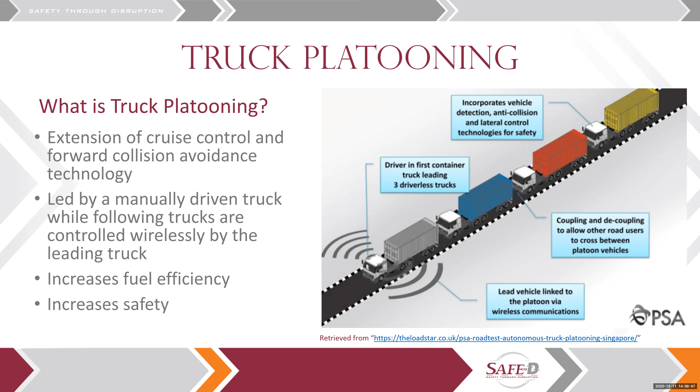Why would we want to have truck platooning? It's because it's considered as potentially increasing fuel efficiency and also potentially increasing safety on our roadways. So the big question is, why do we need this research study, and what are the implications of this research study?

Well, we're talking about truck platooning, and a certain number of heavy trucks, tractor trailers or tank trailers, that are following each other on the roadway. We also know that on these roadways we implement barriers, which could be median application barriers or roadside application barriers. Roadside barriers and median barriers are designed for a single impact. First of all, they are designed so that they should contain and redirect an errant vehicle, not only for the safety of the occupants of the errant vehicle itself, but also for the safety of all other road users that are on the roadway at the moment of impact.

These barriers are usually designed for a single impact, but at the same time, we do know that they are designed with a reserve capacity as a safety factor. So the big question is, due to the consideration that they have a reserve capacity, can we prove whether existing roadside barriers might be adequate? And when I say roadside barriers, I really think about the rigid barriers. Are they adequate when truck platooning, for whatever reason, could potentially fail, and multiple trucks now impact the barriers one after the other, so almost simultaneously?

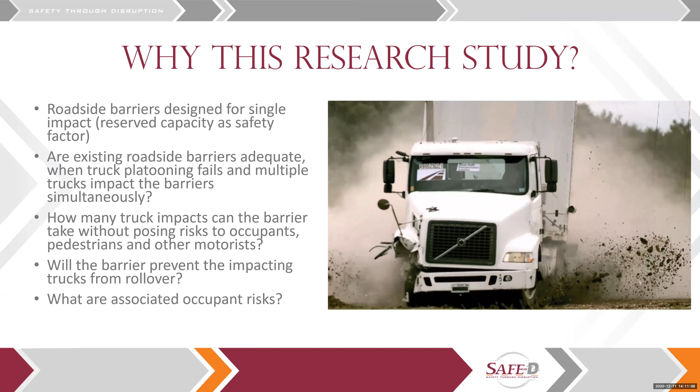So how did we develop this research study, especially considering this was a collaborative effort between the two institutions that have very specific expertise?

The first step was to select representative barriers that we wanted to evaluate. We looked at rigid concrete barriers, specifically types that had been crash tested and for which we have the data so we could use it to validate our computer model system. You'll see that in a moment.

Then we had to develop computer models of these selected barriers, not only to replicate the shape and general dimensions, but also to replicate the concrete properties, the reinforcement, and therefore the strength of the barrier.

Through computer simulation, we then had to validate the model using a tractor-trailer model with respect to an existing full-scale crash test for which we have data, so that we can make sure our FEA, finite element model, is correctly replicating what happened during the impact.

But the subsequent impacts from the other potential truck platooning scenarios were predictive computer simulations. We did a few more after the first one, as you'll see in the next slides.

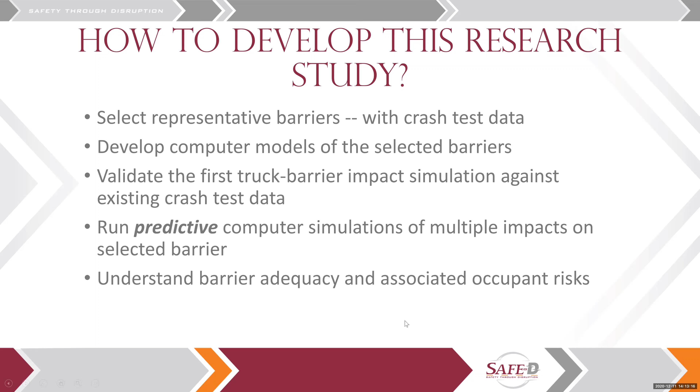There was a specific reason why we chose these two barriers. They were the two barriers for which we had crash data, and they had very specific characteristics that appealed to us.

The interesting part of that barrier is that we also had to develop the model of the deck. Because during these impacts, if these barriers are implemented as bridge rail systems, we need to pay attention to what happens to the deck. We want to make sure the deck wouldn't fail. The barrier might not fail, but if the deck does, that's still a problem.

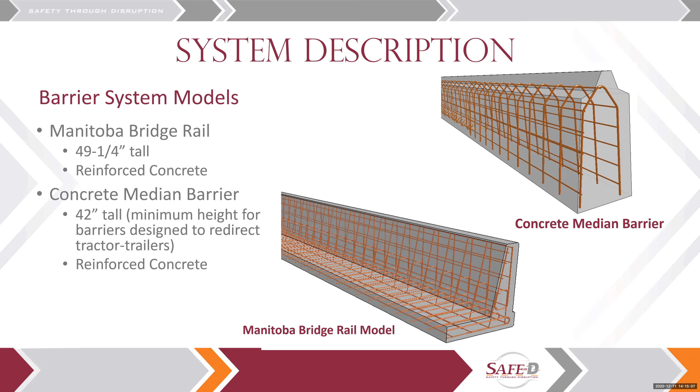The second barrier we looked into, shown on the top right of the slide, is a concrete median barrier. This one was interesting because it's 42 inches tall, which is really the minimum height required from a design and testing implementation for a rigid barrier when we think of tractor-trailer impacts, following our roadside safety MASH standards. So those were some of the reasons we chose these two systems.

To the best of our knowledge, we replicated these impacts following what the current standards for roadside safety barrier testing and evaluation criteria provide.

Our Manual for Assessing Safety Hardware, called MASH, requires that when we design and test these types of roadside safety barriers, they need to be evaluated according to impacts with tractor-trailers. These tractor-trailers need to impact the barrier at 50 miles per hour and a 15-degree orientation angle between the truck and the barrier.

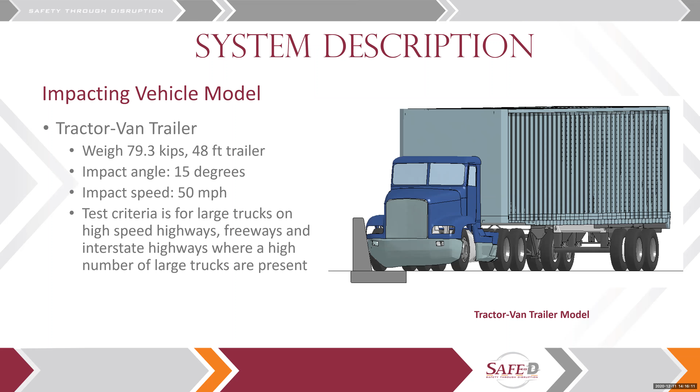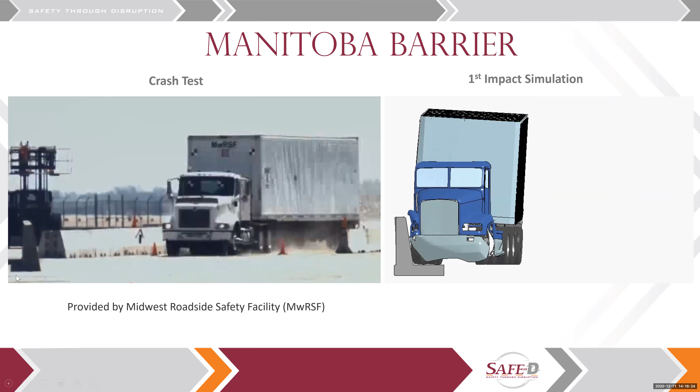So the first few slides are with respect to the Manitoba barrier. On the left of this slide is the crash test that was performed and provided by the Midwest Roadside Safety Facility. On the right you see what I call the validation simulation, which replicates the impact of the crash test and is used to validate the model that will be continuously used in the subsequent impacts.

It might be hard to see, but there is some displacement of the barrier, which ends up as a small permanent displacement. I'll show you later in other slides some minor spalling on the top of the concrete.

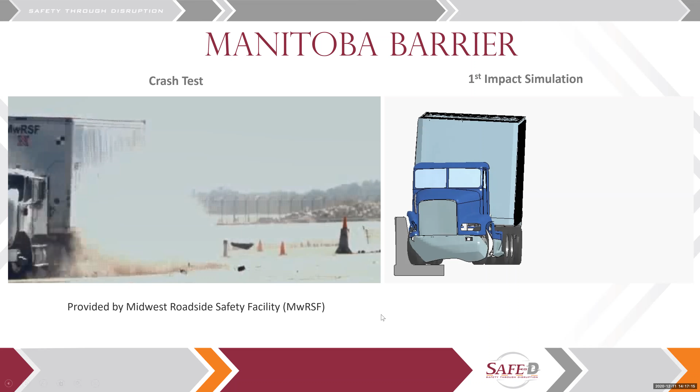But you can see that the model fairly well replicated the crash test. In fact, it was actually validated through the RSVVP program that we use for barrier design.

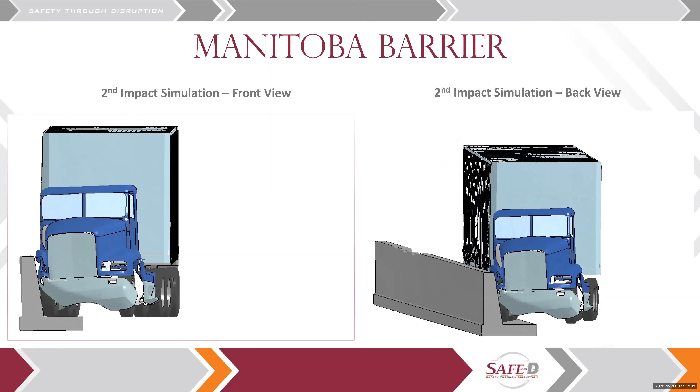The subsequent slides are predictive simulations of the subsequent impacts. This is test number 2, the simulation of impact number 2. This will be the second truck that follows the first one, and after the first one moves away, the second one comes and impacts the barrier.

The barrier already has a preliminary displacement and spalling from the previous test. Throughout the second simulation, you can see there is more spalling and more displacement of the barrier due to the second impact. Again, the truck stays upright and doesn't roll over.

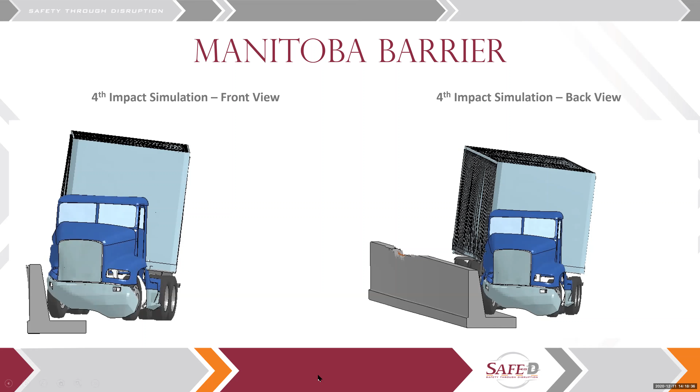This is the third impact. Throughout these impacts, you'll see in the next slides a little more displacement, definitely more spalling on the barrier to the point that we have exposure of rebars. This is the fourth truck coming up now, pay attention to how much the vehicle is rolling. Although the vehicle is still contained and redirected, and would pass all the criteria according to our MASH standards, we still have quite a bit of roll that is increasing more and more.

By the way, in this simulation, which is the last one we performed, you can see there is considerable roll. But again, this barrier was originally 49 inches tall, so even though we had lost some of the height of the barrier, and you can see in red some of the exposed rebars already, still the vehicle was able to be contained and redirected.

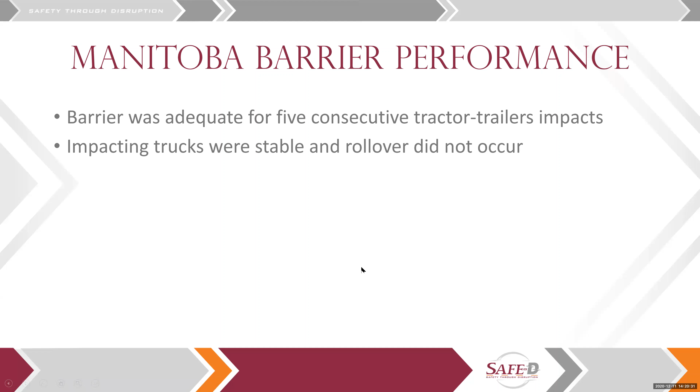Dr. Untaroiu will talk in more detail about occupant risk after I complete this part of the presentation. However, we also have MASH values to evaluate occupant risk, and there were no issues associated with that as well.

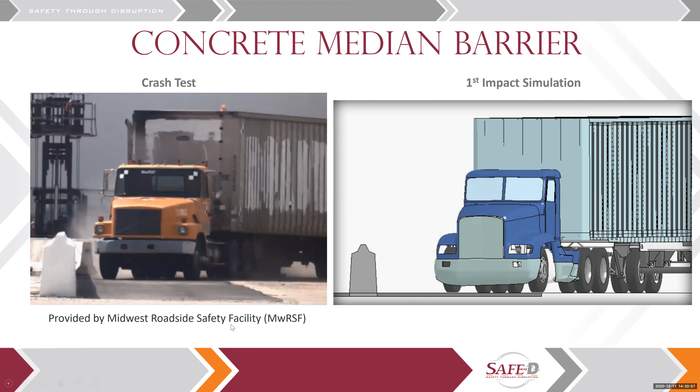My second part of the presentation is regarding the concrete median barrier. This is the test from Midwest Roadside Safety Facility that was performed, and this is the simulation that was performed to validate the model against that test. It's hard to compare when they have different speeds, but you can see it was actually validated as well in terms of performance.

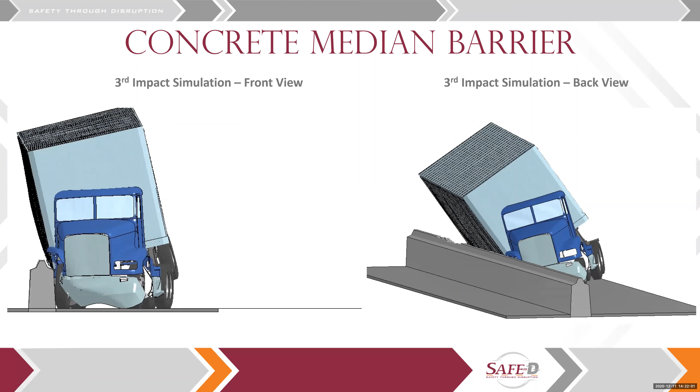This is the third impact. Please keep noting the behavior of the truck. This is the last simulation we performed, with the 4th truck impacting. You can see how the stability of the truck - the vehicle may become more and more unstable.

In this specific case, if you recall at the beginning, I mentioned this is because now we are losing more and more of the effective height of the barrier. It was initially 42 inches, which was the minimum height required.

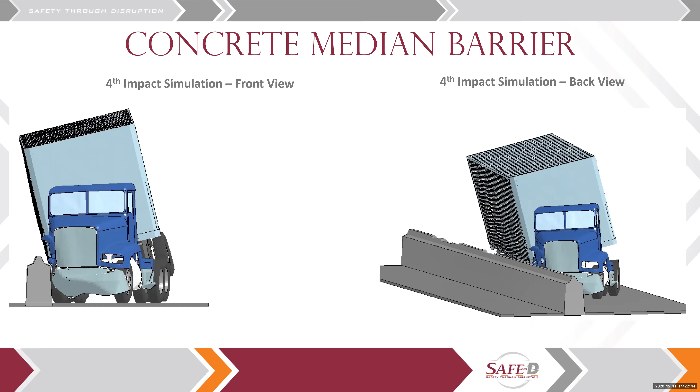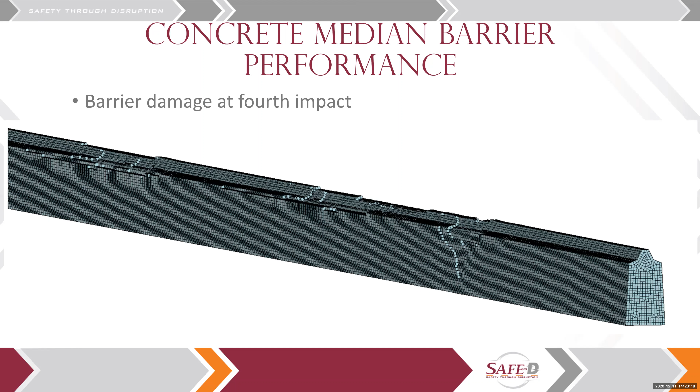We don't get into really exposing rebars as for the other models, but please note how in the location of impact, which for truck platooning is always the same, we have a reduction of the effective height. That would be a big question to consider when we design these barriers, keeping in mind a potential truck platooning.

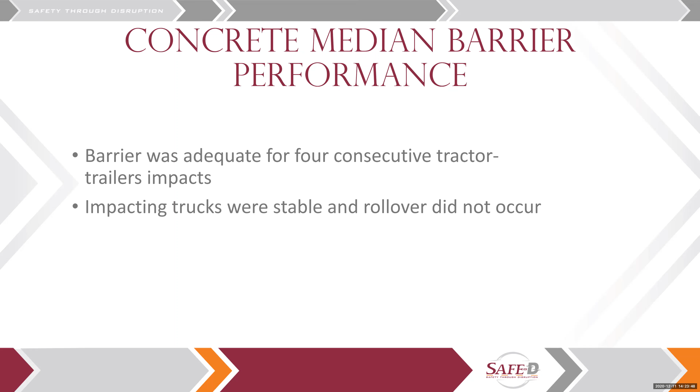Even in this case, for the concrete median barrier, the barrier adequately was able to contain and redirect 4 consecutive tractor-trailer impacts. In all these impacts, the truck was able to maintain stability, although we saw some pretty accentuated rolling angle, but it did not roll over, which is what we wanted to make sure didn't happen.

A couple more slides to conclude, at least from the perspective of the barrier design itself. We can say that due to the impacts at these given conditions, we have a final permanent deformation of these concrete barriers that was less than 3 inches for both of them. We didn't see the likelihood for a catastrophic failure during any of these impacts that happened in series into these barriers.

Both the concrete Manitoba bridge rails and the concrete median barrier are potentially capable of containing and redirecting multiple impacts at these MASH Test Level 5 impact conditions, the 50 miles an hour and 15-degree angle. So it is assumed that other similar concrete barriers with a similar design capacity, that is very important, will show similar results.

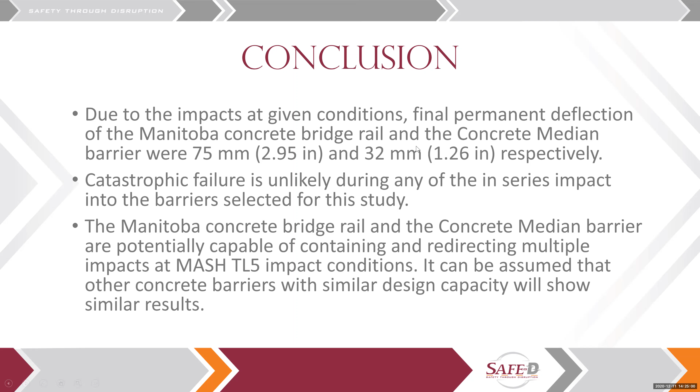Last but not least, we have a few recommendations. We would recommend additional studies to identify potential impact conditions of these truck impacts. We did use the MASH Test Level 5 conditions, the 50 miles an hour and 15-degree impact, because we don't have any other data, or at least at the time of the conduction of these projects, we didn't have other data.

I surely would be very interested to understand what would be the potential impact condition of these trucks. Would it be all the same, or would these trucks, for some reason, slow down or have a different impact angle when we go from the first one to the last truck? That's really an unknown, at least from us, and we think it would be very valuable to investigate.

We also recommend at one point to be able to conduct crash testing on a potential truck platooning on rigid barriers, because we were able to validate the FEA model according to the crash test conducted, but that is really only the first impact. So we don't have other ways to make sure that our predictive simulations are really accurate, especially when you're talking about 4 or 5 consecutive impacts.

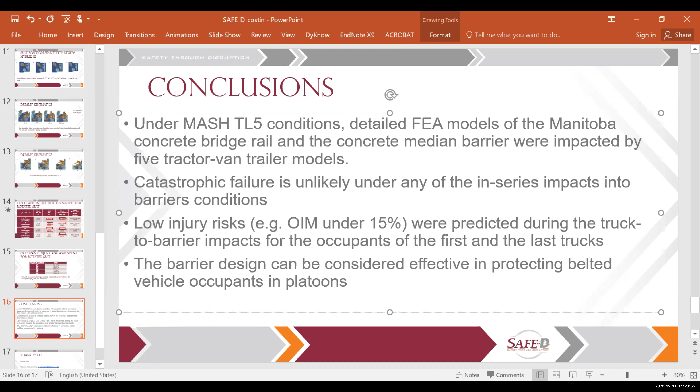This work was done by Chiara and her group at TTI. In parallel with her group, we developed the cabin only. We took the cabin from this truck, which was used in crashing, and that cabin has no interior parts. So we have to take interior parts from literature, the seat and other parts from the interior, and put them in that cabin. We also had to set up the Hybrid III and Thor occupant dummy in the cabin only.

After that, we coupled these 2 groups.

So we got from TTI the nodal time history from some nodes from the cabin, and we apply here the motion to our cabin-only model.

In this way, we first had some different problems here, because one thing, the truck model was proprietary, it was TTI's, so they cannot share it. And the second, we also developed a model which was much more computationally effective, because we don't need to simulate with the whole truck like we do every time when we run with our dummy models.

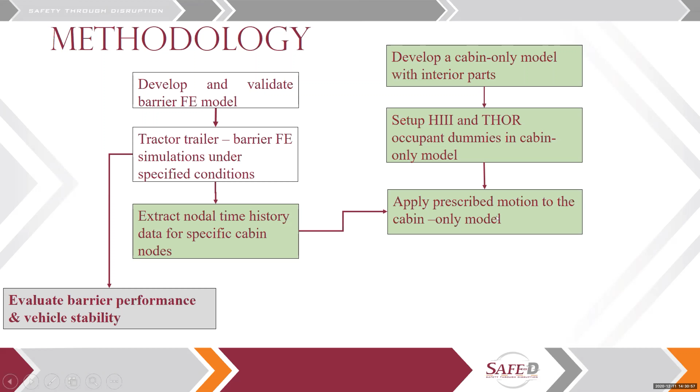Finally, we perform impact simulation with the cabin-only model and seated dummies, and we evaluate occupant risk of injury and seat. We did also a sensitivity study where we changed the seat position, and of course, we evaluated again occupant risk of injury.

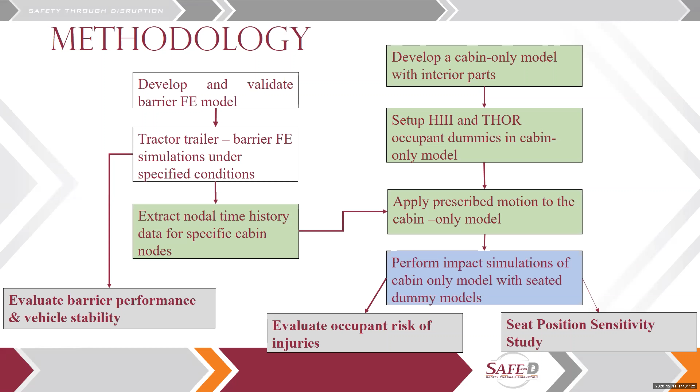This is a kind of big picture of our part. And now I will try to explain every step.

Now, cabin only. We took the same cabin from the truck, so it has the same node numbers and everything. We took, for example, 8 nodes, 4 from the upper side and 4 on the floor, and we prescribe the motion of these 8 nodes.

And we put also some boundary conditions here in such a way to see if we can predict the same motion, because we're interested more in the seat, right? Because we transfer the whole motion to the seat.

And how we verify our model: we took another 4 nodes, which are not prescribed motion, and we compare what we got from this model, from cabin only, with the full model, with the truck. And here we found small differences, I think I remember 3 or 4% maximum in displacement. So this gave us some confidence that our cabin model moves in the same way as the full truck.

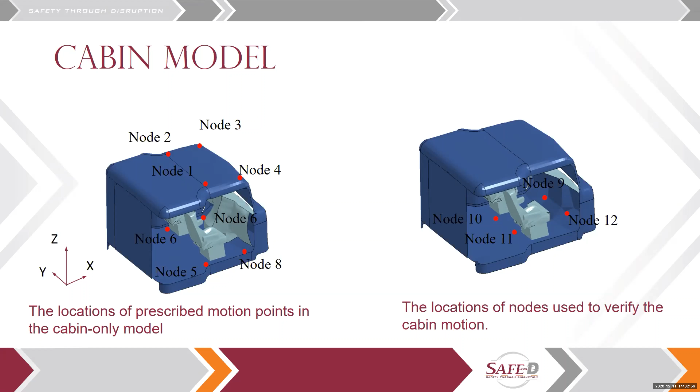After this, we move to put a dummy in the seat. We start with a hybrid 3 dummy model. This model was developed by LSTC, a software company who also developed LS-DYNA program, which was used by both groups, TTI and Virginia Tech.

And we also develop the belt system, restraint system, and so on. Here we had also some testing in our lab for belts, so we put material properties from our test to be sure that they are realistic. And we start to run simulation with this model. So this is hybrid 3.

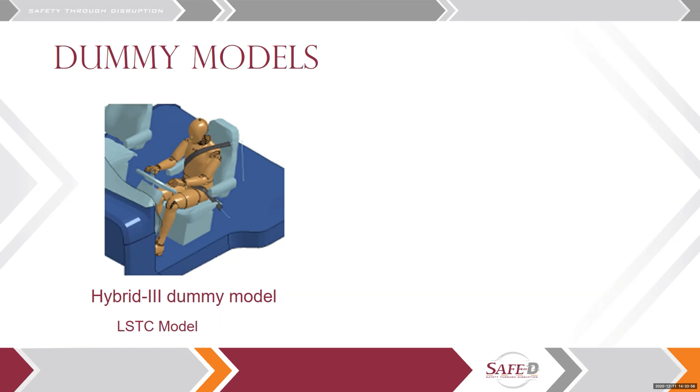Another model, we use the THOR dummy model. The THOR dummy model needs to be considered to replace at some point hybrid 3 with THOR dummy. It's a dummy more advanced than hybrid 3, more biofidelic and so on.

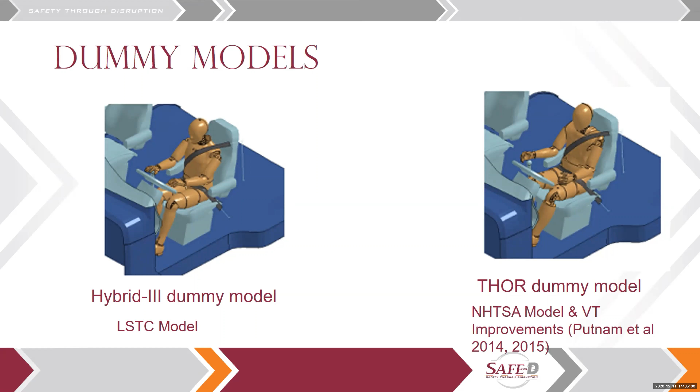And here, occupant injury is assessed based on the dummy. So we use 4 criteria for injury for the head. This is well known, it's HIC. It's based on acceleration of the center of gravity of the head.

NIJ is based on the forces in the neck and chest, the deformation, deflection of chest, and femur, the force in the load cell in the femur. And this is the injury criteria here. It was developed in literature we took from Yoganandan in 2015.

The probability of injuries, there is this function where you introduce HIC and you calculate, for example, how much is the probability to have a head injury, for example. So this is injury of certain body parts, right? Head, neck, chest, and femur.

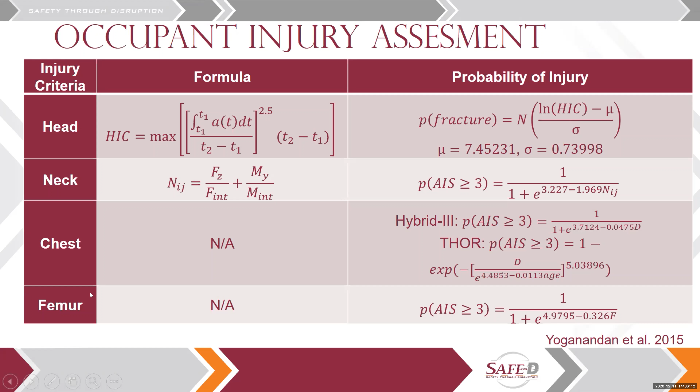But in order to compare the different conditions, we have to combine all in a number, and we call this occupant injury measure. It was proposed, for example, this formula by a group, Crash Avoidance Metrics Partnership, Advanced Restraint Systems, CAMP project. And so we use this formula from that project.

So this is the probability of injury of AIS 3+. AIS 3+ injury means serious injuries. AIS, it's abbreviated injury scale. It was created by the Association for the Advancement of Automotive Medicine.

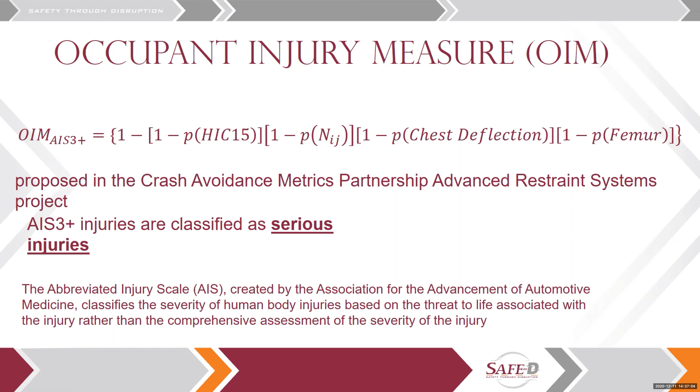And it gives you a kind of injury risk based on what you measure on the dummy.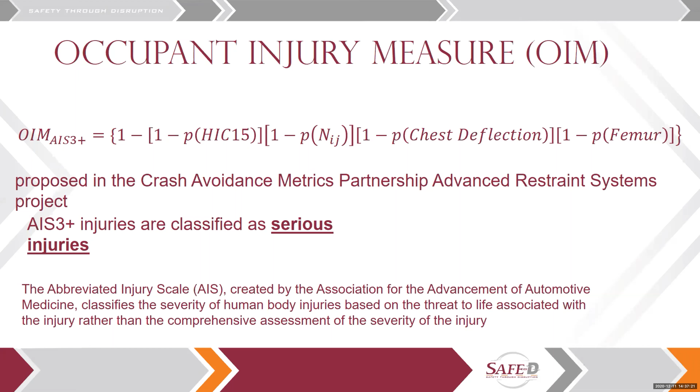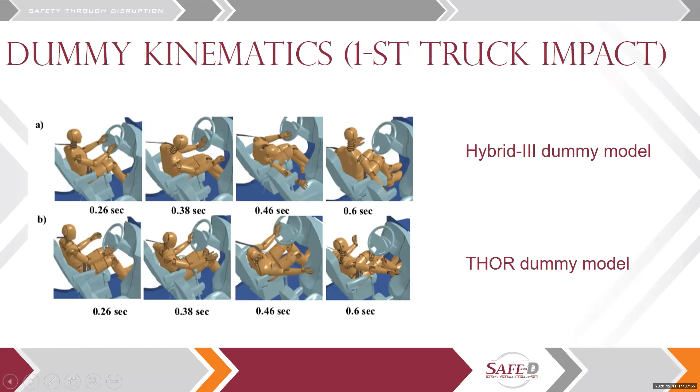At the beginning, they are somehow similar, but there are also some differences, especially when you move to, for example, 0.5, 0.6, and so on. This makes sense because they're different models.

In terms of injury, you don't see so many differences, actually. In head, we have very low probability of injury. I put here only the first and fifth impact, the first and the last impact. The highest injury appears actually in the neck, but still it's very low, under 10% probability. And also in chest a little bit, 3 or 4% in hybrid 3, but not much in THOR. Anyway, the probability of serious injury is very, very low.

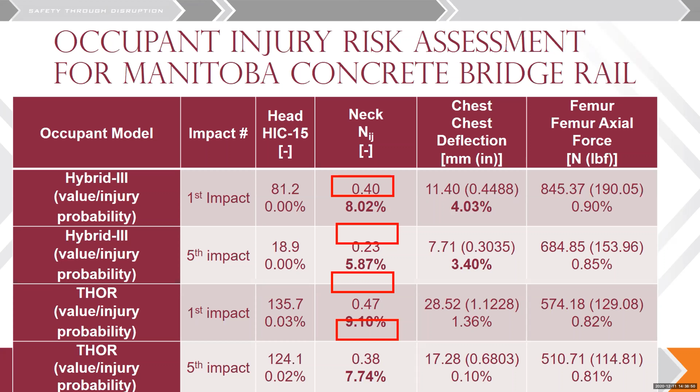So this was with MANITOBA concrete bridge rail impact. Here we calculated also OIM for this. Again, you see on OIM not a big difference between these two. Hybrid 3 in first impact is 12, with THOR it's 11, which means that both dummies are effective and there is not a big difference.

This also gives us more confidence, because if you run with one dummy, maybe you say the problem is with that dummy, but when you run with two and you get similar results, it means you're more confident. The OIM value anyway is under 15%, which corresponds to relatively low injury risk for occupants. So it seems it's not a high risk for injury.

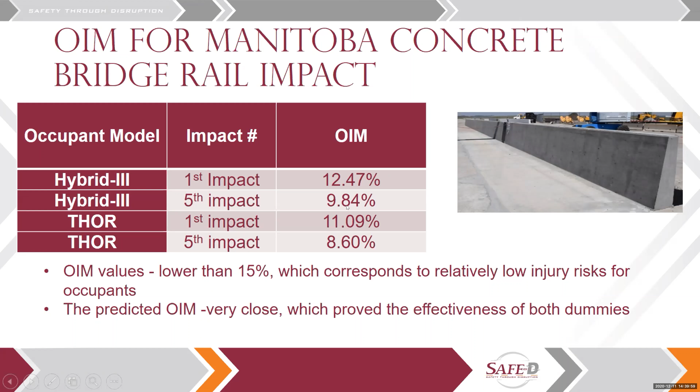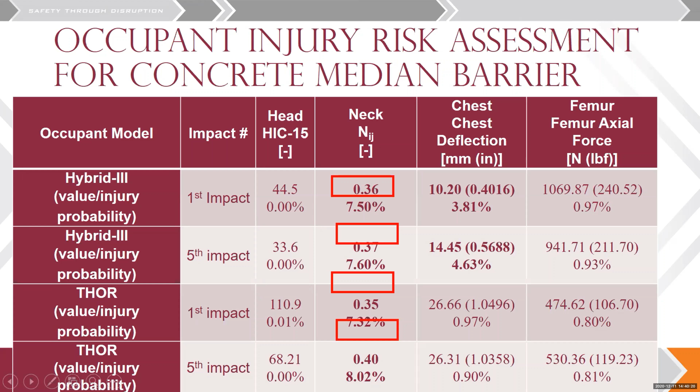The same was with concrete median barrier. I don't know why my boxes are not in the right place, but anyway, you see somehow similar to what we saw in MANITOBA barrier. The values are not far away, but here it seems to be a little bit smaller, but anyway, very, very small injury risk.

And you see the same trend. In neck, you have higher probability of injury. You don't have almost nothing in head, and a little bit in chest for hybrid 3, but femur under 1%. So again, you can say the probability of injury is very small.

The same in OIM, so when you put all together, all injury for body regions, you see that hybrid 3 predicts about 11-12%, and THOR about 9-10%. This is a very low injury. So hybrid 3 actually predicts a little bit higher than THOR. Usually I see in other simulations, other tests, different—usually THOR predicts higher than hybrid 3, but here it's more, I think, related to the sliding of the belt on the chest than other stuff. Because anyway, both are very small, so you cannot say too much.

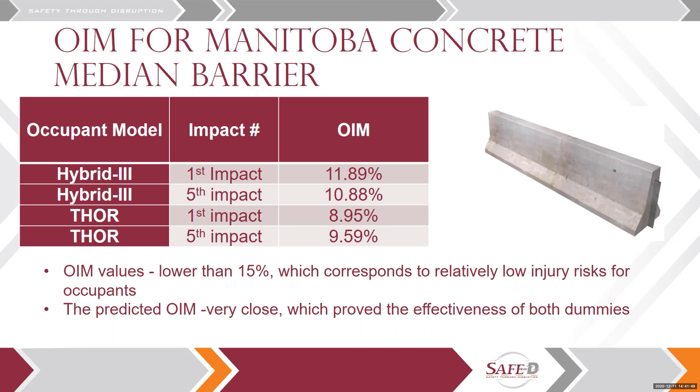Regarding, there was also a discussion on what happens, for example, when the driver will not stay in the same position, because we talk about automatic driving. So probably the guy will not stay on the steering wheel, but probably will not have steering wheels. So what happens when the driver stays at different angles? This is a big question right now also with other cars, you know, sedan and SUV, not trucks. What happens when the seat is rotated at different angles?

So we placed this with hybrid 3 here. We moved the seat a little bit from where it was at the beginning, in order to have space here. And we rotated the dummy 15 degrees, 30 degrees, 45 degrees, and 60 degrees from the traditional seat, 0 degrees. So we wanted to see what happened.

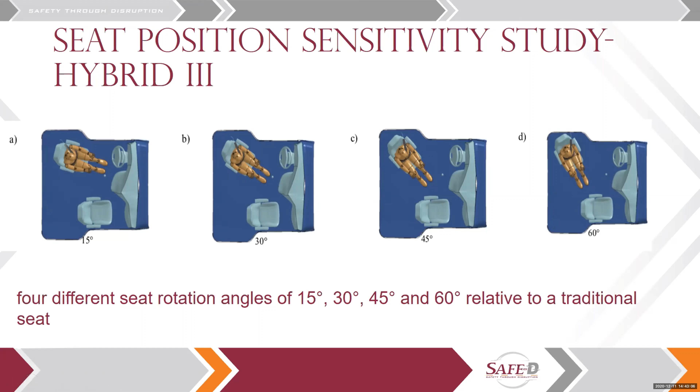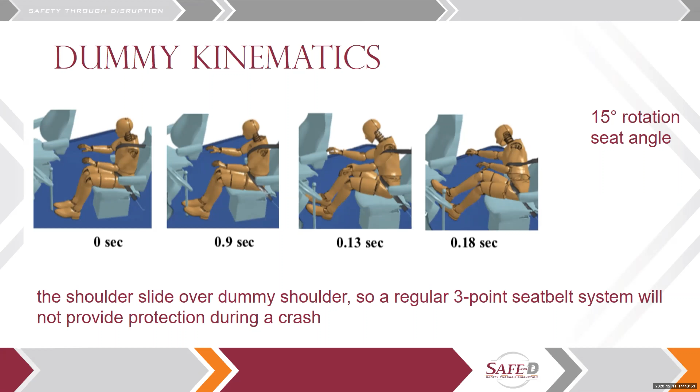This we saw also in another project, with sedan stuff that we ran. It's when you rotate the seat, you may have a problem with the belt, because the belt will slip from the dummy. So here you see, for example, the kinematics different for a seat at different angles: 15, 30, 45, and 60 degrees.

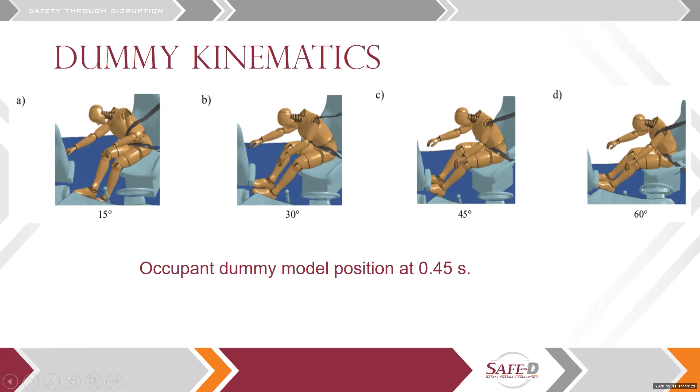It seems that the worst was 15 degrees. 30 was probably better, and 45 and 60 also. But if you look at the numbers, they're pretty small, so you cannot see too many differences.

For example, it's somehow similar, between 6 and 8% in neck, and in chest it's between 4 and 6% injury. In head and femur, almost always under 1%, a little bit above here, but this is not important. So the take-home message is this: the injury is lower.

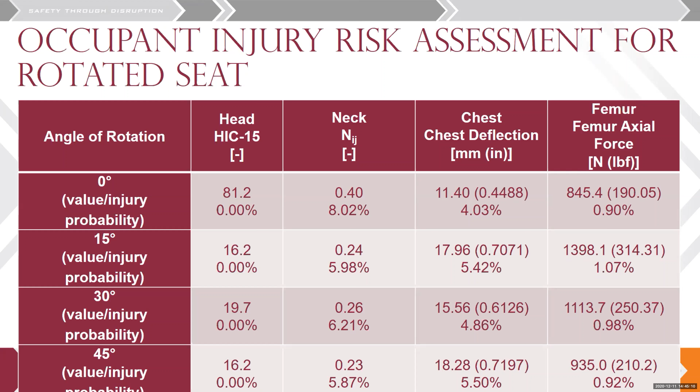And if you have the kind of risk of injury, it's only in the neck. And if you look at the whole occupant injury risk for the whole dummy rotating seat, you see the number is not different, about between 11 and 13-14%.

So even with rotating seat relative to the truck, the occupant injury risk remains low.

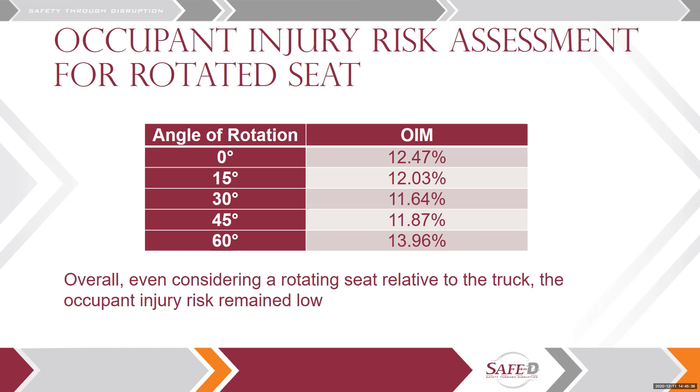So the last part, the last slide, it's a kind of conclusion. Some of the conclusions were also mentioned by Chiara. In this MASH condition, the Manitoba bridge rail and concrete median barrier were impacted by 5 tractor van trailer models, and we didn't see any catastrophic failure. We saw also low injury risk in OA, for example, OIM was under 15%.

And this means that the barrier design can be considered effective in protecting belted vehicle occupants in platoons.

Regarding recommendation, we use now dummies, but probably it was better to use human body models. And right now we have global human models, for example, which can be put in this configuration and run to see more specifically what kind of injury will appear.

Another thing, we consider only 50% male. So what happens, for example, if the driver has different anthropometry? Again, this can be done with different models, with female 50% model, with 95% male, and so on. But I don't expect too much difference. Probably the small female will have higher injury risk, and the big guy will have lower, but not too far from what we saw, maybe 12-13%. So probably this is what we can expect.

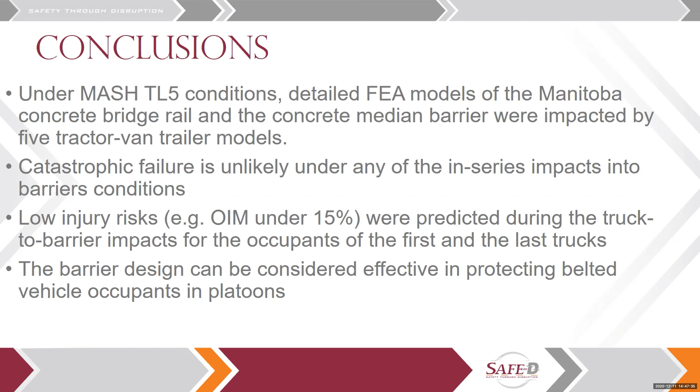So this is all. If you have any question or whatever, you can contact us, Dr. Chiara Dobrovolny, and I'll post my email. So this is all. Thank you.